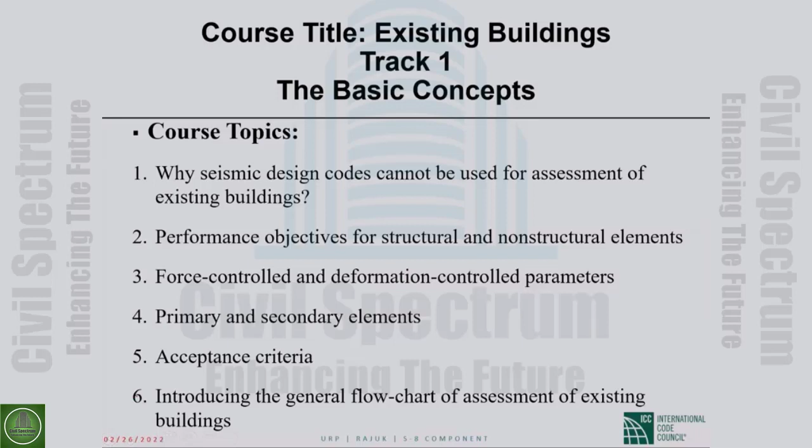First of all, I'm sorry that I will spend some of your time on material that all of you know. But as I said, it is very critical for us to find where exactly seismic design is separating from seismic evaluation. Based on that, we can make our methodology for the evaluation and later for the retrofitting.

So if we look at the procedure for design of a building, what that means for us, or what we do in designing the building—usually there are many elements in a building. We classify those members into load-bearing elements. Some of the load-bearing elements carry the gravity loads, vertical loads, some carry lateral loads. So these are the main point for us in design, designing these load-carrying elements.

Also, there are other elements in the building that we don't really depend on to carry the vertical or lateral load of the building. They just need to carry the vertical and lateral load of themselves and be anchored—that's good enough for us. So in design, mainly we look at the load-bearing elements. That's our main duty.

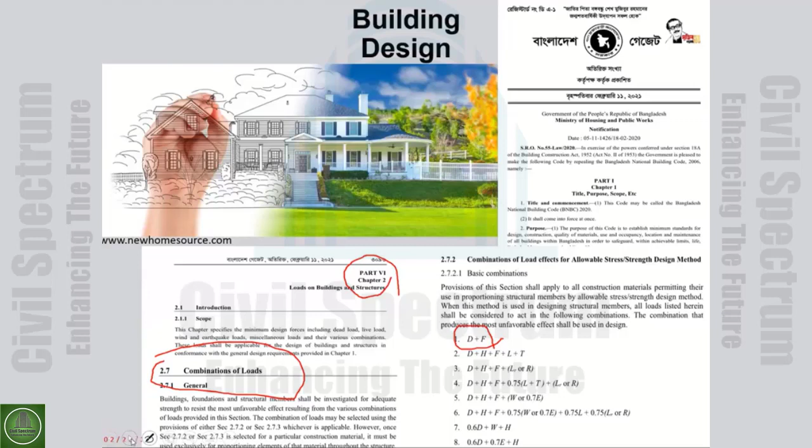Then sometimes many clicks needed to go up here.

Now that we have calculated the demands, we want to design. What exactly do we design? When we say design this building, what is the design? What item are we designing? As I mentioned, for a specific beam, there are different response parameters, for example, different force deformations.

For example, for the axial load, for the shear in the beam, for the bending moment, for torsion, we have the values of the load. The behavior that we want from each of these response parameters in building a structural design.

I emphasize building a structural design because later I want to go through building seismic design. But in the building structural design, we want the behavior of all elements to remain in the elastic linear stage. Because of that, the force-deformation relationships for axial, shear, moment, and torsion are all drawn in the linear range of behavior in the figures.

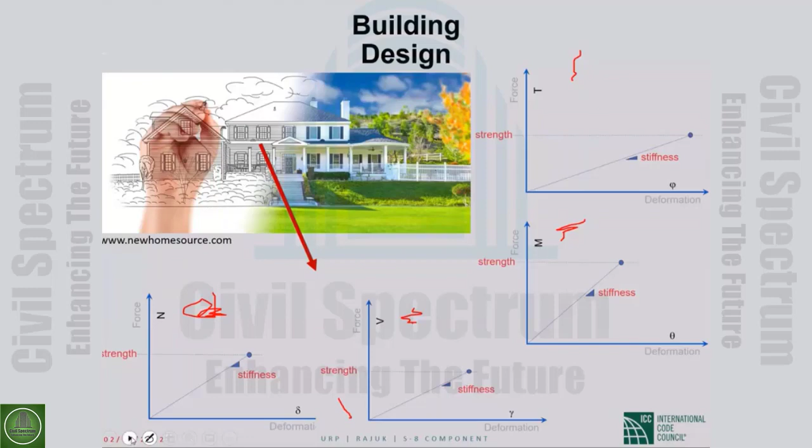As we can see, for example, in BNBC Chapter 6, it says 'strength design of reinforced concrete structures.' So it clearly says that all the articles here give you the approach for how to design an element to have a specific strength on the vertical axis.

Therefore, the load that causes this demand is not important. So in the steel code and the concrete code, in the chapter on design for strength, we don't say that if it's under, for example, dead load or live load, whatever load causes this much demand, we should provide enough strength that matches that demand.

So our design for buildings that don't get damaged is designed for strength, designed for force. Our design approach is force-based design. We design for force; all these articles are for designing the strength of the elements.

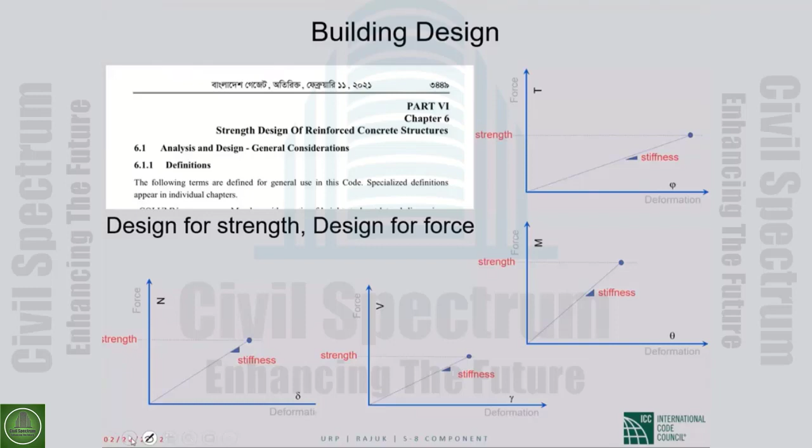As I mentioned, we design for strength and then check for stiffness. So, in short, for ordinary loads, we expect the building before loading and after loading to remain the same. Because the designer calculates the demands in all elements very precisely, and we have good codes so that for each element, each response parameter can be designed such that the capacity, the strength, is more than the applied demand. So in all the design codes, this is emphasized: it's strength-based design.

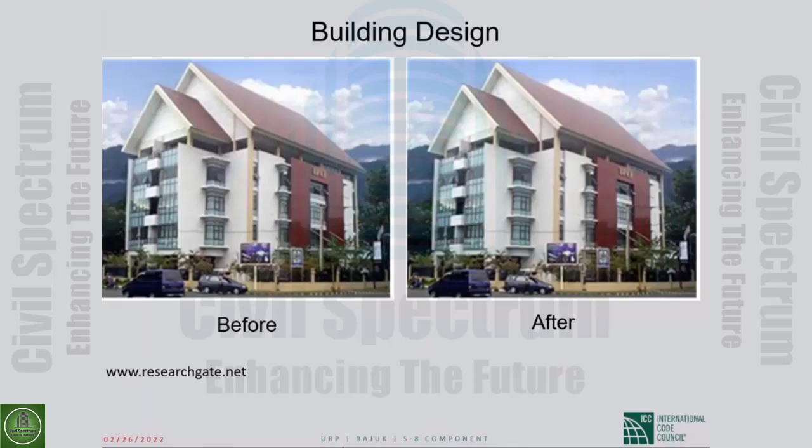But how about not ordinary, extraordinary loads? It depends. Some extraordinary loads are not that large, so it works for loading that doesn't always apply to the building. Every now and then there is some wind, and the amount of wind is not that much. So it's better to design the building such that it doesn't get damaged.

But there are many extraordinary loads that, if we want to design a building that doesn't get any damage under those loads, the design becomes very uneconomical. Again, it depends on the region, because if designing for earthquake, in some locations there are not that many earthquakes, or if they happen, the intensity is small, so it's worth trying to design them to remain linear elastic. But in many cases it is very costly.

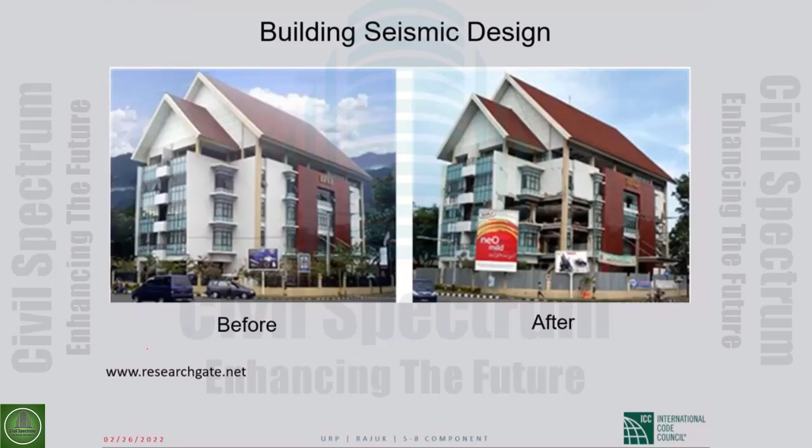And to be sure, these are referenced - I know you had courses on both the structural part design and seismic, but again, because I need them later as talked before, we have in chapter 6, for example for reinforced concrete, the strength design - all the items there is for designing under ordinary loads, the way that the building remains undamaged. But then we have article section 2.5 on earthquake loads, and then in 2.5.2 earthquake resistant design, and the bad news are said there.

It says that the purpose of the earthquake resistant design provision in the code is to provide guidelines for design and construction of new structures, subjected to earthquake ground motion, in order to minimize the risk to life. Minimize, not avoid completely - we don't expect a building that doesn't get any damage. For all structures, to increase the expected performance of higher occupancy structures as compared to ordinary structures, and to improve the capability of structural engineers.

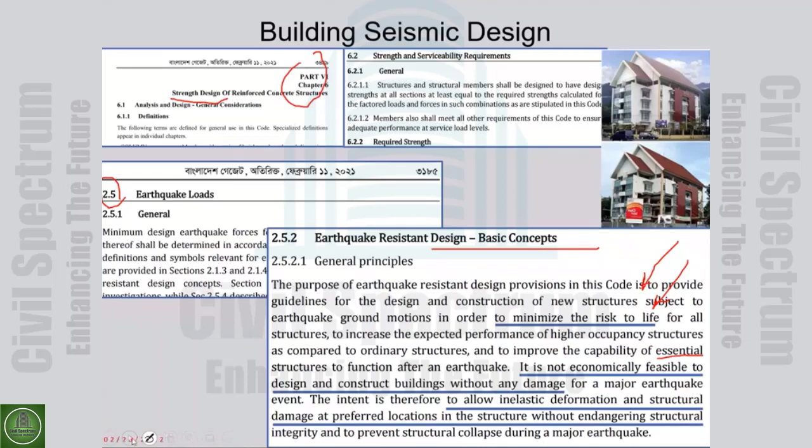One good thing that researchers usually do after earthquakes is use the earthquake ground motion record, and sometimes the specifications of the buildings, to model and study what happened to a particular building.

For example, this is from a paper presented at a world conference assessing damage to a 5-story building during one of the earthquakes in Chile in 2010. A very nicely built building like this, after the earthquake, becomes this. For sure, the intent of the code is not this way.

If everything was designed according to code and this happens, and if the level of earthquake that occurred is around the design level earthquake, then we should change something in our code so it doesn't happen. Because we accept damage, but as mentioned in the BNBC, we don't accept collapse, just damages.

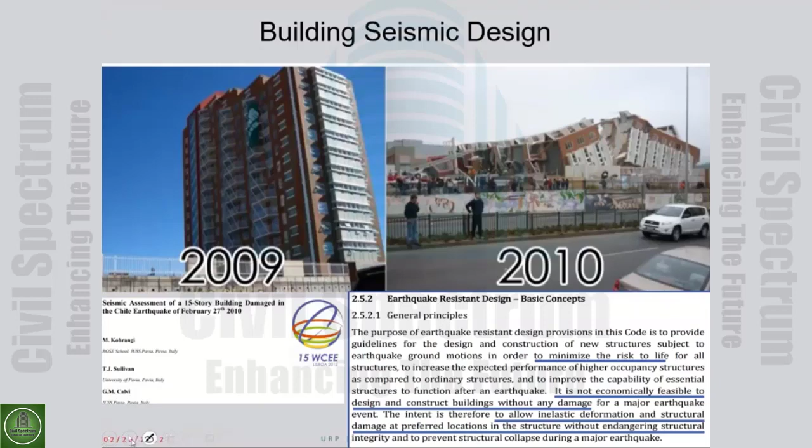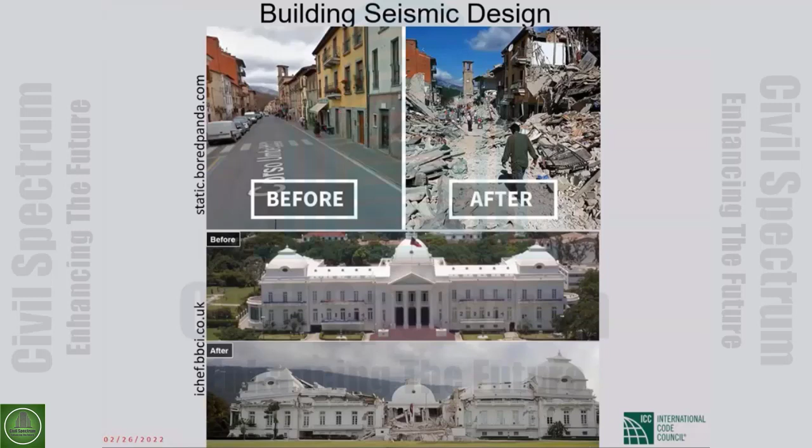Another example here — again, these are not according to code. Or if it's shown they really designed them according to code and this happened, then we look at the level of earthquake. If the level of earthquake is around the design level and this happens, then our design articles, approach, and requirements need some modification. We don't accept this — the code, when it speaks of acceptable damage, means not losing stability or integrity.

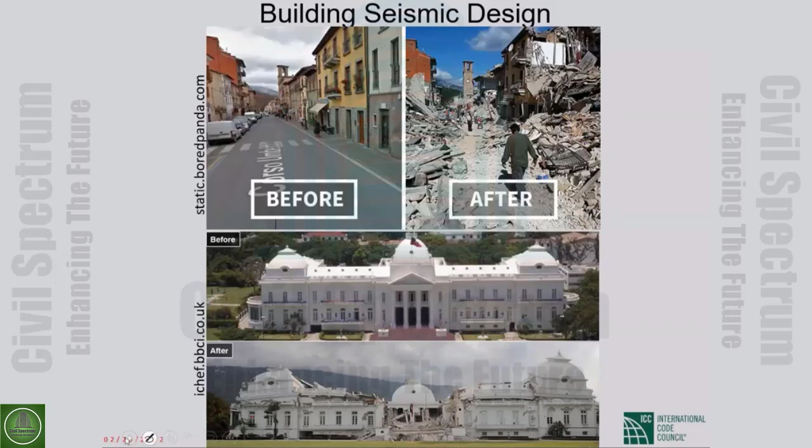Here, for example, in the bottom picture, the middle part had more irregularity compared to the other parts and got most of the damage. So we don't expect this much damage. It is not according to code, and if it is, the code needs a change in that respect.

This one is also not the way we expect or accept as the intention of the code. For example, the building before the earthquake has a floor at the ground level, but after the earthquake, the ground floor is gone. As you know, soft story relates to stiffness, and weak story relates to strength on the vertical axis. A weak story has less strength, and a soft story is one where the slope of deformation for the story is low.

In previous versions of the code, the penalty for irregularity was only a change in the method of modeling and analysis. So if you had a building with some kind of irregularity, previous codes said there's no problem — you can go ahead, but you should use more sophisticated analytical methods, like response spectrum or dynamic analysis instead of static analysis. But they didn't forbid you from designing a building with irregularity.

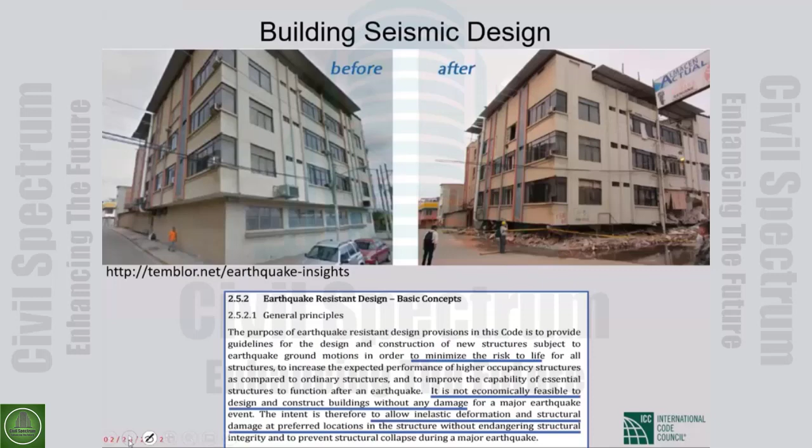If this is designed with code, and it does happen, it was not the intention, and they should modify the code provisions. But these are according to code.

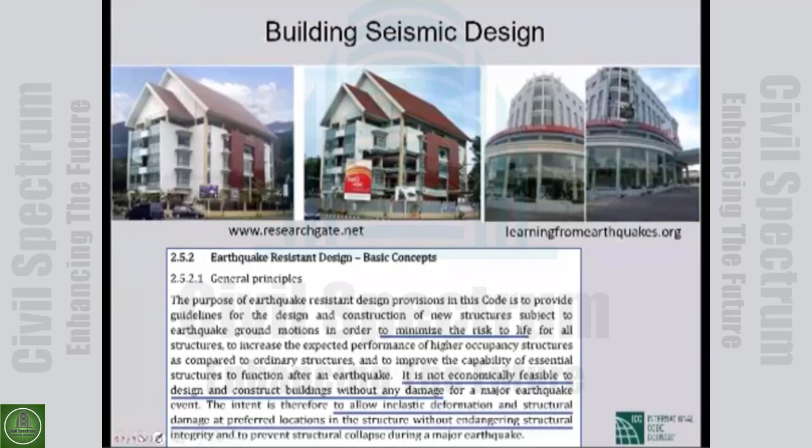The building gets damaged. There are lots of damages in the elements, and most probably this building will be demolished after this earthquake.

This one maybe can be taken care of with some retrofitting, but anyhow, this is the building that we, as a structural expert, give to our clients, and after this earthquake, they don't believe us that we design according to code, because they thought that if your building is the new building according to new code, it shouldn't get damaged. But really, we are designing for damage. The way that we design, we expect this kind of damage.

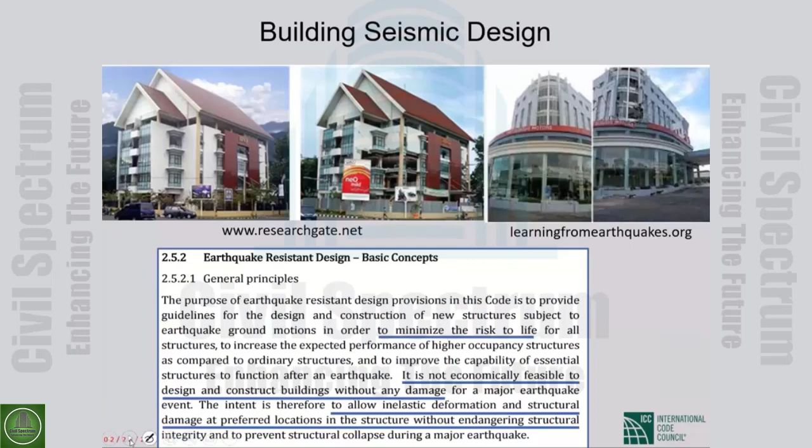So, very good. Now, how can we handle that in the new code, this kind of very complex behavior? How can we handle that in our design for the new buildings? Then we can use the same approach for existing buildings, so there is no need for an extra approach, extra code, extra course. What is the problem? Where is the problem? We should try to find the problem.

So again, the main question is, can we use the seismic design approach of BNBC for assessment of existing buildings? We are using this approach, a very nice, up-to-date code for the new buildings on the left. For the new buildings, we model, we check the stress ratios. If there is a problem, we change the property of the element, solve it, and then we get the final design. No big deal, nothing too complicated needed, and we are using such an advanced seismic design, especially for these new complex buildings.

Then for existing buildings, for old ones, it should be much simpler. We shouldn't make it more complicated. But why is it like this, that we make it so complicated for existing buildings, which are generally much simpler, older buildings, compared to these new, complex, up-to-date buildings?

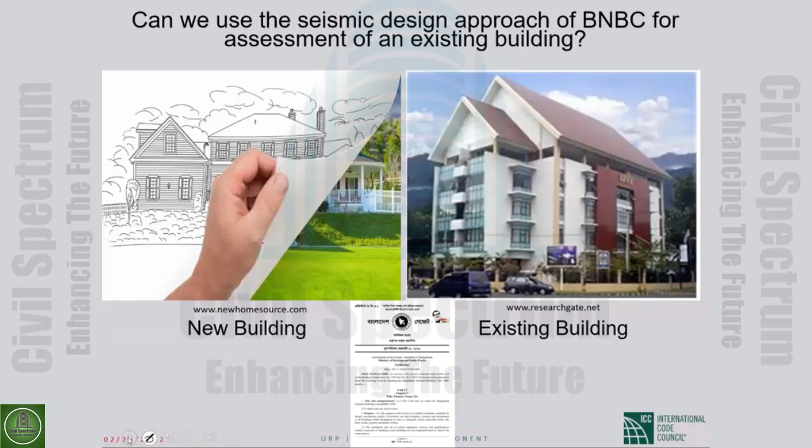Therefore, we should look at BNBC, I wrote NBCC, so BNBC, seismic design for assessment of a building, how it works, how we design for such complex behavior for this building, for example. Lots of damages at different points, but it has a stable situation and integrity almost remains. So how do we do that? Which complex software do we use to handle this kind of behavior?

Where do we look at the inelastic deformation, how do we check if this inelastic deformation, which means damages, if these damages are endangering structural integrity or not. Where during design, I can't see any location that we really model or check any damages, or level of damage.

No, everything was so simple: calculating a base shear, distributing it along the height, using an elastic model and software, calculating the response parameters in the elements, and then going to the code and designing so that the strength is more than the demand. So where is this complex behavior that I've shown down there? Where do we look at it?

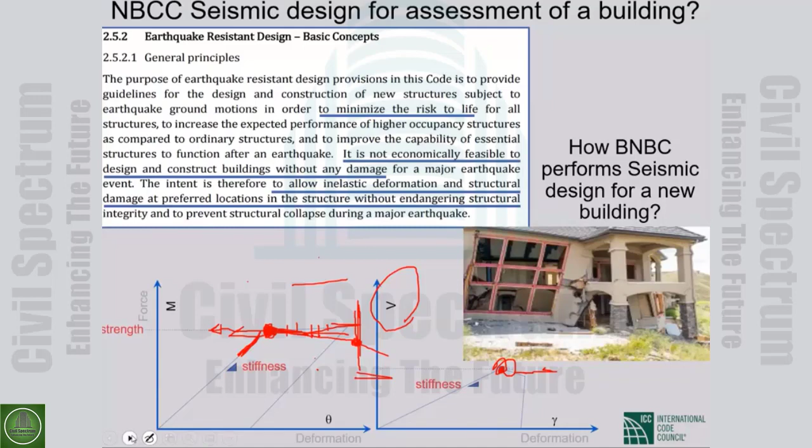Go to BNBC. What do we do in the BNBC? We assume a level of earthquake, for example a fraction of the maximum acceleration for an earthquake with a return period of 475 years, modified by some coefficients. This acceleration multiplies by the mass, the G now is the mass, it becomes weight. Using the second law of Newton, we get the force.

So everything is almost clear, a very easy approach. We calculate the acceleration, multiply by the mass of the building, get the force the building should withstand, and then we design that building for this.

What exactly do we do? We calculate V, the base shear, we apply that in the load combination with other loads to the building. For each element we calculate the maximum response parameter, and then we design. But when I say design, we design strength, the strength for this. And that's done.

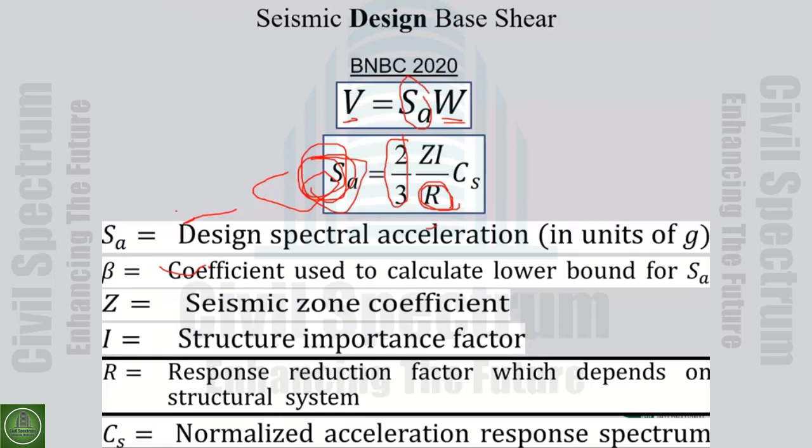Here we impose damage. You know that the design level earthquake will impose R times this value to the building, but we design the strength, ordinary strength design, for 1/R of that load. So we accept damage - we, as a designer, are making damage to this building at the design level because we divided by R.

Okay, now we did a good job. We reduced the strength, and now we are sure that in the design level earthquake the building will get damaged, for sure, because our estimation is R times that will impose to the building. But we put the strength, the capacity, at 1/R of the demand. So it will get damaged.

But how about looking at the level of those damages? If those damages are acceptable or not for each element, for each response parameter, see if the level of inelastic deformation passes the ductility capacity of that element or not. But usually we don't do that.

How is it possible? It's a dangerous approach. We design a building for, say, 1/5, 1/7, 1/10 of the loading, and then we are happy that it won't collapse—it'll get damaged, but won't collapse. No, it's not that simple.

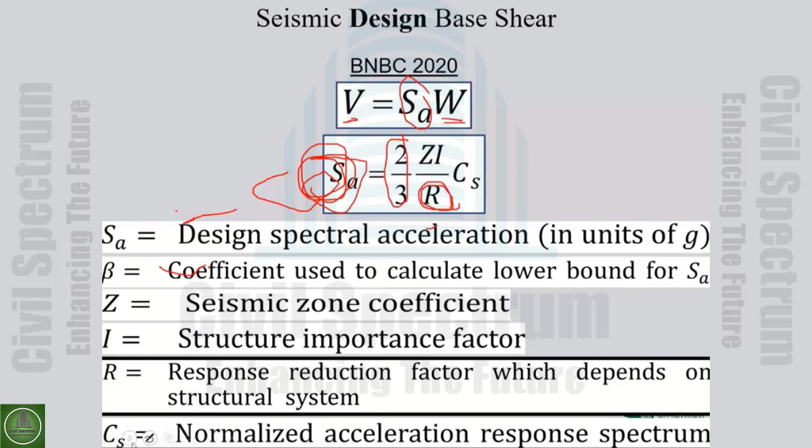For these R values, how we calculated that is based on the behavior of each lateral load system. We look at how much ductility each system has, and based on the ductility that system can provide, we assign a specific value for R. If a system's capacity for ductility and damage before losing strength, before losing integrity, before losing stability is less, we use less. And if it's more, we use more.

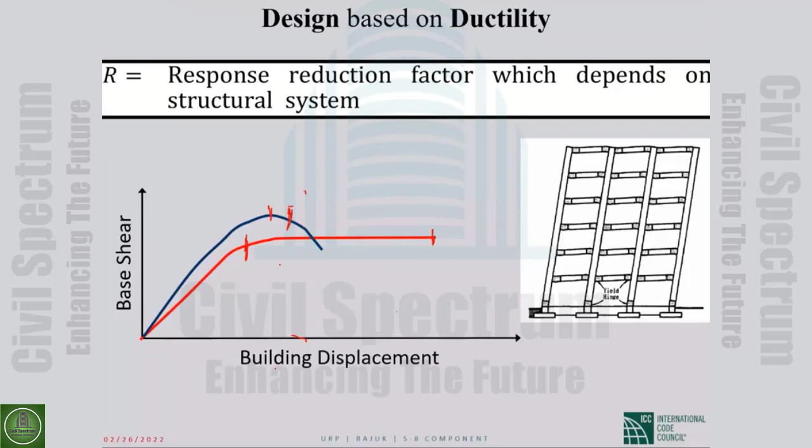So the relation between these concepts: we design for a smaller strength that we know causes damages. We know that causes damages because it is R times less than the level of base shear for the design level earthquake. And a design level earthquake is just a 475 year return period earthquake. It's not 1,000, 2,000, 3,000 years. It's just 475.

So it's not a big deal. But again, even for that, we divide the base shear by R, 1/5, 1/7, 1/9, 1/10. So we reduce really drastically the amount of base shear. So we know that strength is very less than the applied load.

And this gets damages. Ductility is the capacity that with our design and detailing, we can make those damaged parts behave such a way that they get damaged, but the stiffness can go to zero, it becomes a mechanism, but it can handle some plastic deformation without losing strength. This is the key word, without losing strength.

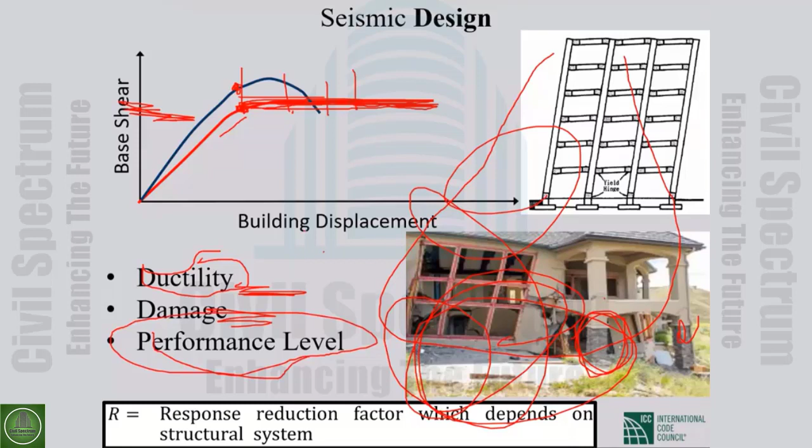So performance levels that we see later are different levels of damage: here becomes IO, here becomes LS, here becomes CP. So the relation between ductility, damage, and performance level is they are directly connected, saying the same concept. So by assuming R in our formulation in BNBC, we accept that we need ductility, we will have damage, and the performance levels are not elastic performance levels anymore.

The building will get damages. And this very difficult behavior is covered by design requirements, by prescriptive design approach, and by detailing. We don't see that in the model. We will continue on this to reach the point that, unfortunately, for the third part, this approach is not working for existing buildings. And because of that, we need this course.

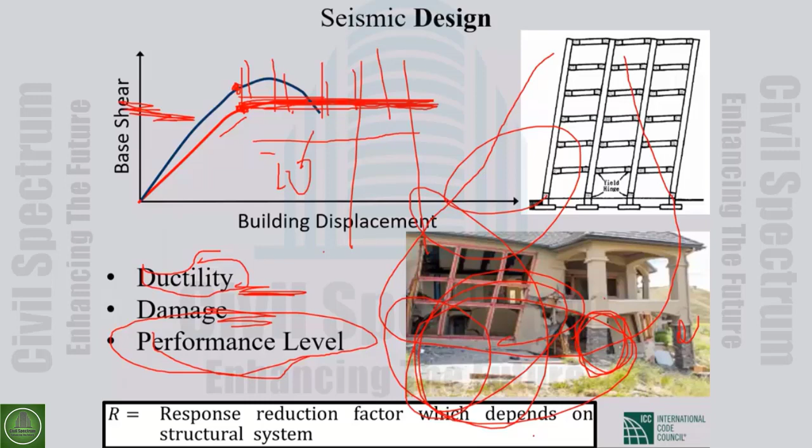Therefore, if we continue, as I mentioned, the vertical axis here is base shear, and the estimation of the base shear in the design level earthquake by BNBC is this value. This value is the estimation of BNBC of the design value, that a 475 year return period earthquake will impose this much base shear.

But we cannot build the buildings for this much, because we see for buildings in earthquake prone zones, usually this value is too much, so it becomes a very strong, very heavy, very costly building. So very easily we accept damage. In the calculation, we say put for this level of strength this much, or this much, for R1 or R2.

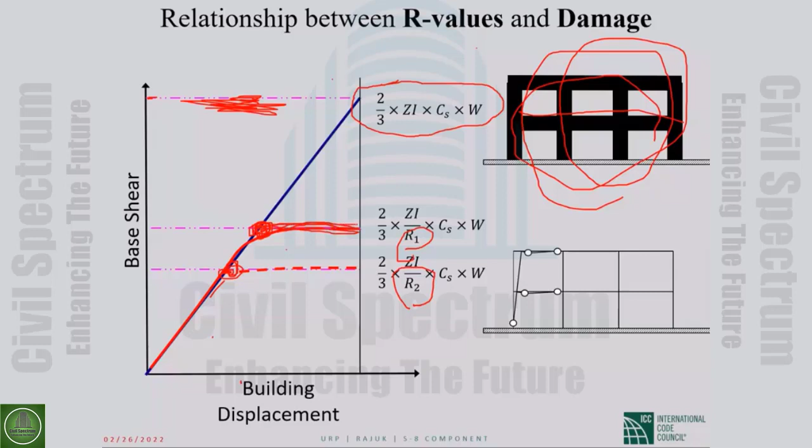But we know the consequences. If you design it for R1, you should provide this much ductility capacity in the building. But if we consider that for all the cases this is the level of deformation in buildings, which for many buildings is true, then if you design for R2, you should pay for it with much more detailing, because now the building has very small strength, very easily gets damaged, and you should provide lots of capacity in these points that get damaged.

Very good detailing is needed. It's not easy that a reinforced concrete section gets damaged, the reinforcement yields, cracks increase, and still it keeps its strength. Still the stiffness is zero, so much damage that the stiffness is zero, but it still keeps the level of loading it was handling before. It's lots of detail.

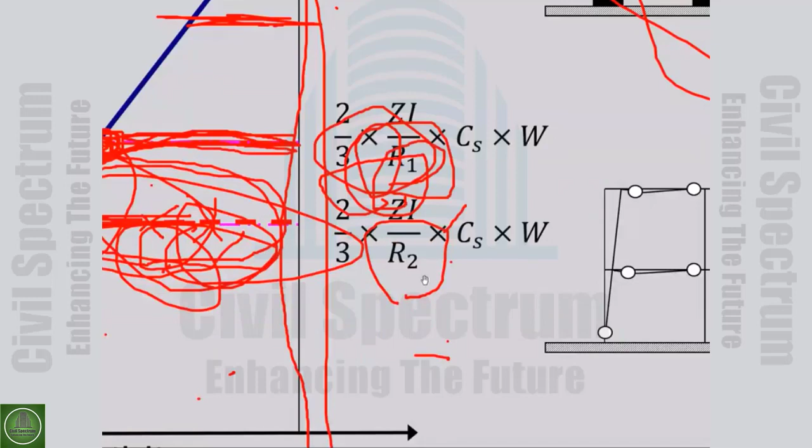Therefore, that's the main point in our approach for new buildings. What is this? Okay, that was in fact a very good thing.

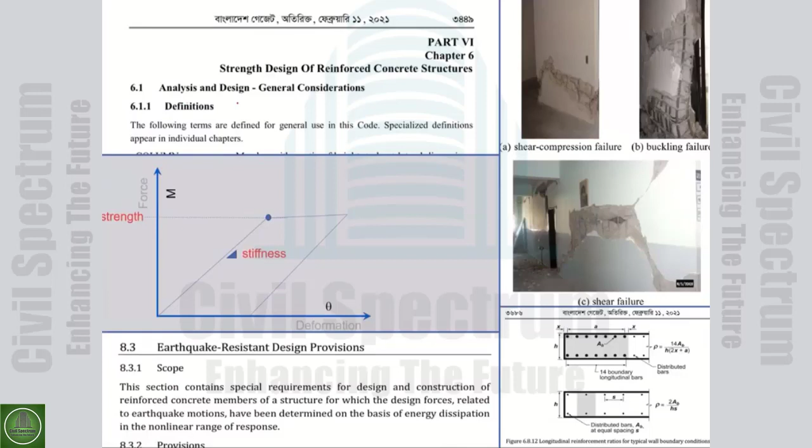So, as a sample, if we want to check where those difficulties and complexities lie, in chapter 6 in general... no sorry, chapter 6 was strength design. Where are those complexities here? 8.3 - earthquake resistant design provisions.

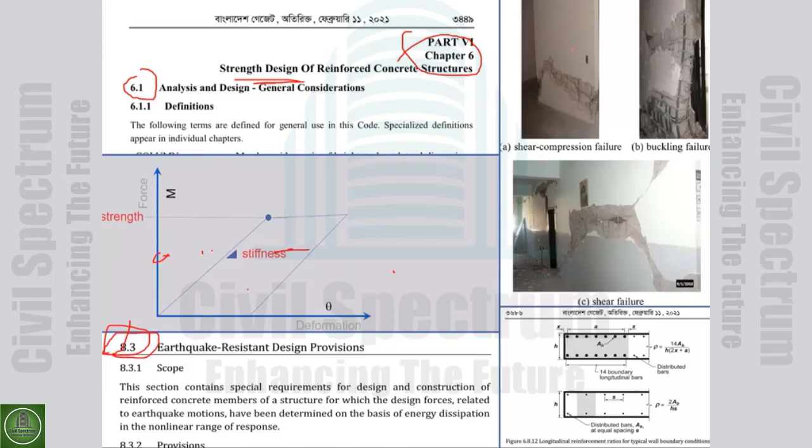Here you see detailings, lots of details, for this building with a shear wall that we are designing so nicely and simply - elastic, in SAP, in ETABS, very easily. But if we expect such complicated behavior during earthquakes, we don't actually model this behavior.

We just use detailing provisions, which we can call ductility-providing chapters. You see here it says earthquake resistant design.

The name of the loading is here. We shouldn't name the load in the design code. What is the difference if axial load is from dead load or from live load? We want this much strength, we want to design for this much strength. But here, we don't want the strength.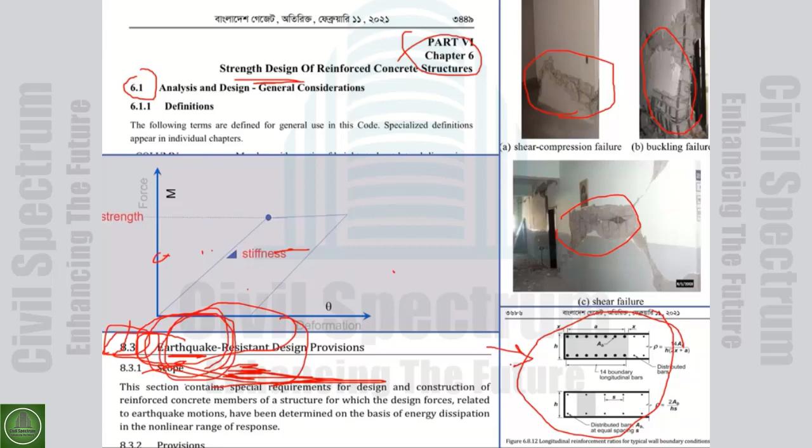We want the ductility. For this specific loading that requires ductility, you don't check it in the design or modeling analysis - by just applying the provisions, you get acceptance. So, to summarize, earthquake resistant design for new buildings has two parts.

One part is simple modeling and analysis. This is part one - very easy, simple, elastic, linear. We apply the load divided by R as the base shear and design the strengths.

We know everything we get from this is technically wrong. We know the displacement isn't accurate, because the real displacement in the earthquake is more. Because of that, we always multiply the displacement we get from SAP or ETABS based on the system we are using. But we are putting a smaller strength into the elements, and we know that this causes damage.

The second part, taking care of this damage, is not in the modeling analysis. We could ask that everybody designing a building for earthquakes use nonlinear analysis, because the behavior of a building during an earthquake is nonlinear - it gets damaged. So you should model the building completely nonlinearly.

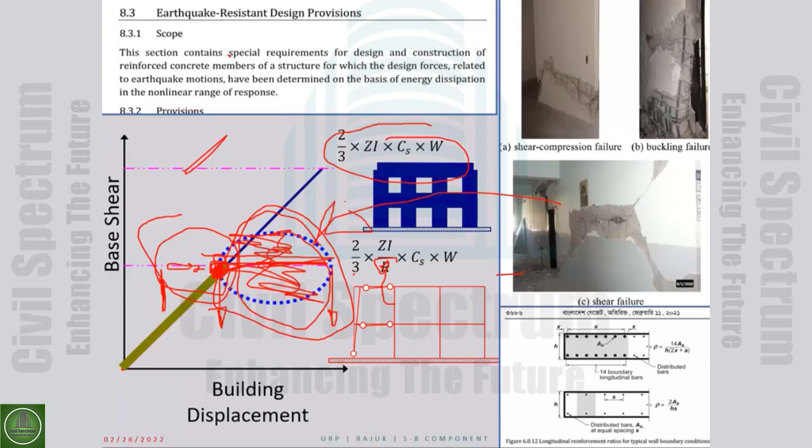Can you hear me? I think I lost the voice. I hope you can hear me. Can you hear me? Yes, Dr. Moghadam, we can hear you. Hello. Hello. I hope, Dr. Moghadam, you have... because I lost my voice in this system. We can hear you, Dr. Moghadam. Okay, assuming that you have my voice, I'll continue. Hopefully, Dr. Moghadam, can you hear me?

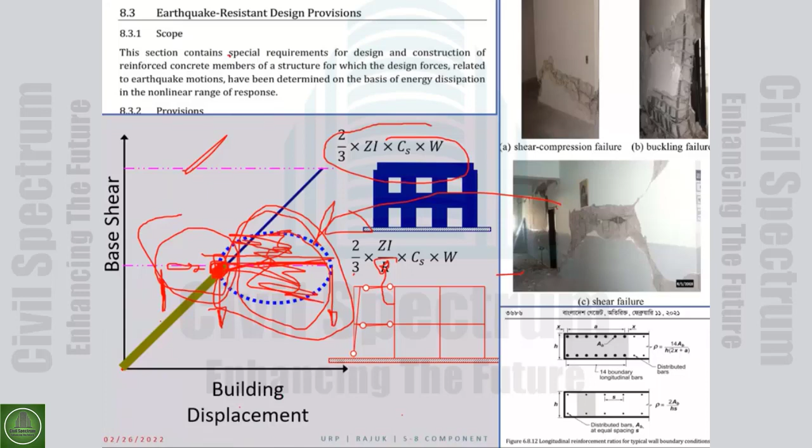That's true. Okay, so to summarize the way that we design buildings - for new buildings, we use a very easy approach for the modeling and analysis, and then we have...

Okay, I have a message. We still have... oh perfect, I put this here. Yeah, very nice of Mr. Rudra. Yes, please give me feedback, because I put a system in front of me just to see if my voice was going through, and it disconnected. Perfect.

So what we can do here, to give the general approach, very simply - in BNBC, we estimate the base shear.

For design of existing buildings, tomorrow we will discuss how we calculate the base shear. It's much simpler than BNBC, so it's easier. It's a couple of coefficients, and then again, second law of Newton, same as here. Here the coefficients seem much more difficult than here, so again we do the same thing: calculate the base shear.

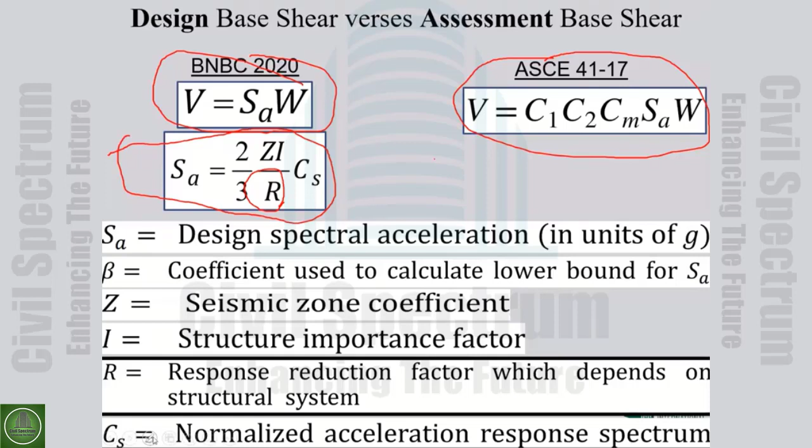I should also remind that when we say evaluation or assessment of the existing building, it's not always a very difficult job. All of you experienced structural engineers, you know, you have lots of experience. You just go to a building, a concrete building, a masonry building, steel buildings. You can find many deficiencies and provide some detailing or advice to increase the seismic behavior of that building. It's not very... the easiest is just to try to reduce the weight of the building.

Some of the floors, some of the slabs, some of the partitions - if you can reduce the weight, it will reduce it. So not always the evaluation and assessment of existing building should be difficult. Just when we say the systematic way is more difficult. Otherwise, we have many methods.

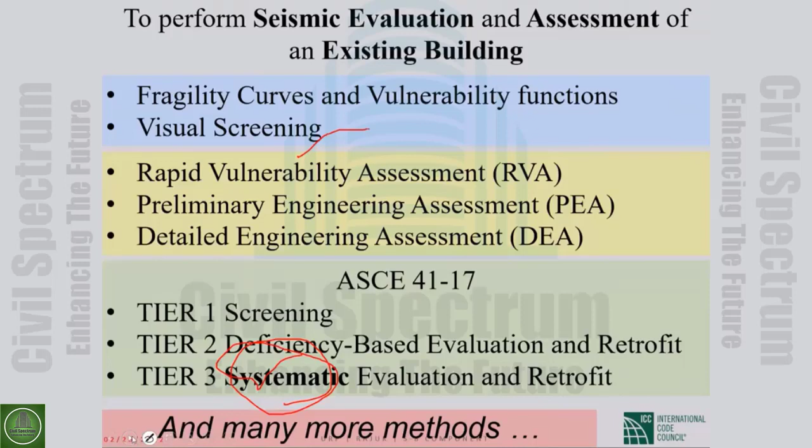That's the systematic evaluation. So when I say systematic evaluation, I repeat - systematic evaluation means we want to check the building, the performance of the building at different levels of earthquake, and come up with results showing it can pass the requirement of that performance level. This needs modeling.

Therefore, when it comes to earthquake consideration for buildings, we have a long history of codes and standards for new buildings, such as BNBC. Very up to date, very good.

For existing buildings, during these 10 years it has become, mostly you see in the world, like a standard. Before it was pre-standard, just some recommendation.

But for buildings that experience damage, they are even more difficult to model, because from the cracks, from the residual displacements, you should determine for each element how much to reduce the stiffness, how much to reduce the strength of that specific response parameter, and how much to reduce the ductility capacity of that element because of the observed damage.

As far as I know, we don't have a standard or code for post-earthquake damage assessment. We have a few reports, but not good ones.

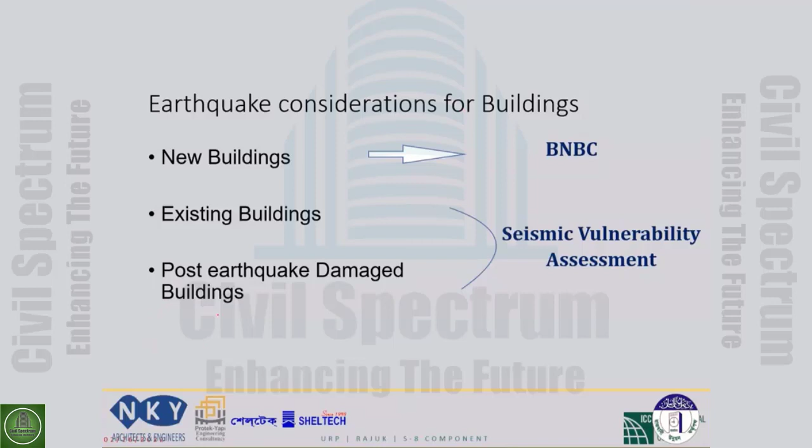So for new buildings we have a long history of engineering. Existing buildings are much newer for systematic evaluation. For post-damage earthquake buildings, we are still a little far from a systematic approach.

For this systematic approach, sometimes it's called DEA, detailed engineering assessment or detailed engineering analysis, sometimes it comes under ASCE 41 systematic evaluation and retrofit.

There are some concepts that are needed. We should be able to consider different levels of earthquakes, and we should have different levels of damage, which we call different levels of performance. We should be able to check whatever they ask us.

If they say check this building for this level of earthquake, for example a 100-year return period earthquake, for this level of performance, we should be able to. If they say for a much longer return period earthquake, for another level of performance, we should be able to do that too. So this performance-based evaluation is a main part and main structure of this approach.

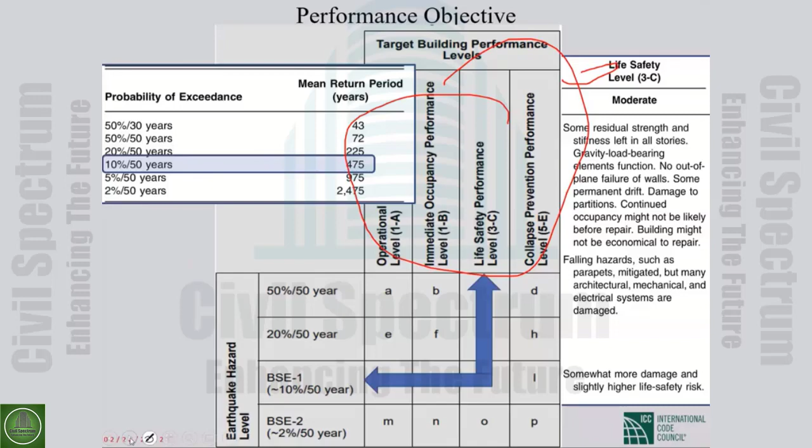So it's very important that for life safety, gravity load bearing elements shouldn't have out of plane failure, some permanent drift, damage to partitions. This gives a sense of what we expect when we go to the building after an earthquake. But then we have specific engineering demand parameters that quantify this life safety. This is the general overview of the damage, but then we need quantification, and the quantification is acceptance criteria - such as the M factor I mentioned instead of R factor.

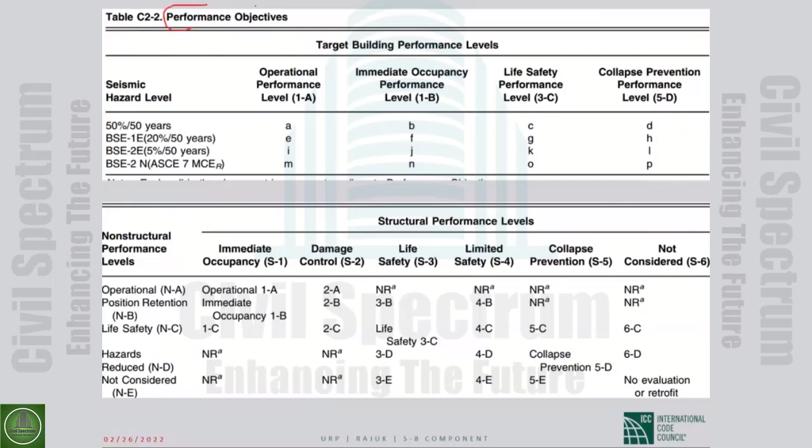So one important part of this systematic existing building evaluation is discussion about performance objectives. Because otherwise, many times the people who use a building and want to retrofit it have very unrealistic ideas - that it behaves very well under very large earthquakes, and that retrofitting can be provided, but it will be very costly. So the consultant should explain the consequence of selecting each performance objective.

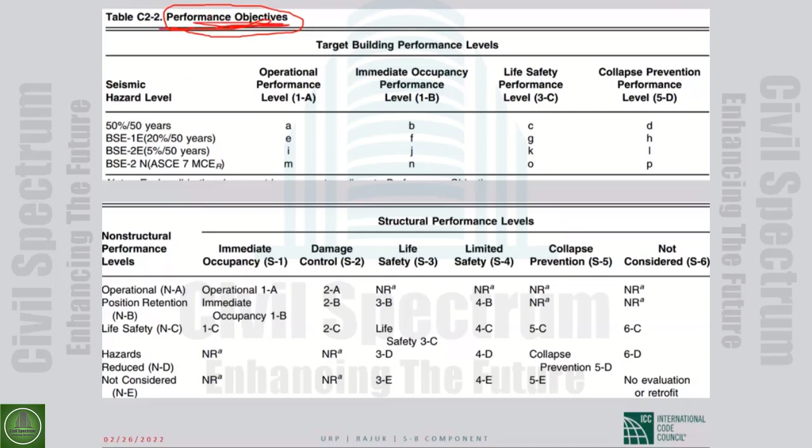When you say, for example, for this earthquake, I want my building to reach immediate occupancy performance level, providing this same performance level under larger earthquakes will be much more difficult. This performance target - building performance levels - have two components: one is structural, one is non-structural.

So you can see here, when we say immediate occupancy performance level is 1B - 1 is for the structural part, immediate occupancy, and B is for the non-structural part. Another table will show it. So very nicely separated, showing what you want from the structure at different levels of earthquake, and what you want from the non-structural elements at each level of earthquake. Sometimes it's not recommended to select certain combinations, especially for non-structural elements - that happens very often. So when we say the structural performance level, it means how much damage you accept.

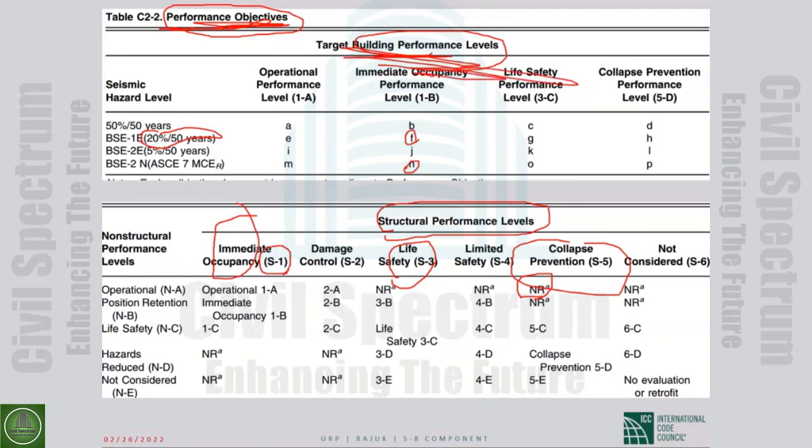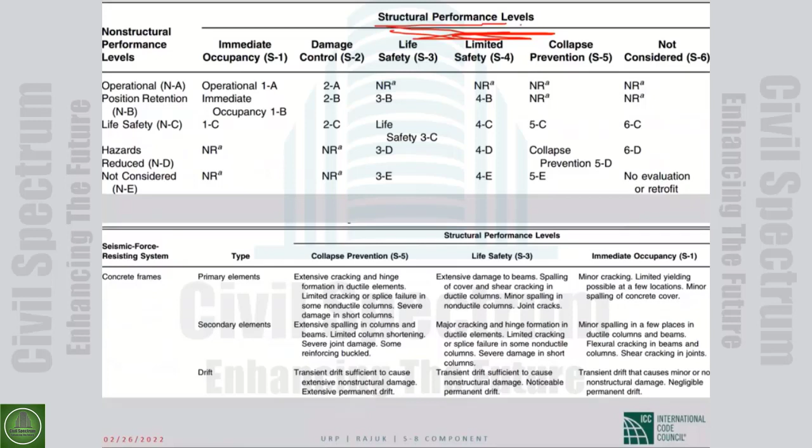So for the building, the target performance level for the structural parts, same thing here - structural performance level.

Here I copy the concepts for structural performance levels, same table as the previous slide. For example, for a concrete frame, when we say collapse prevention, what that means to the primary elements - those that carry the lateral load versus elements that just carry the gravity load. From the drift point of view, that's what collapse prevention means.

When we say life safety, what it means for a concrete frame is extensive damage to beams, spalling of cover, and shear cracking in ductile columns. In immediate occupancy, it's minor. But in collapse prevention, it's extensive.

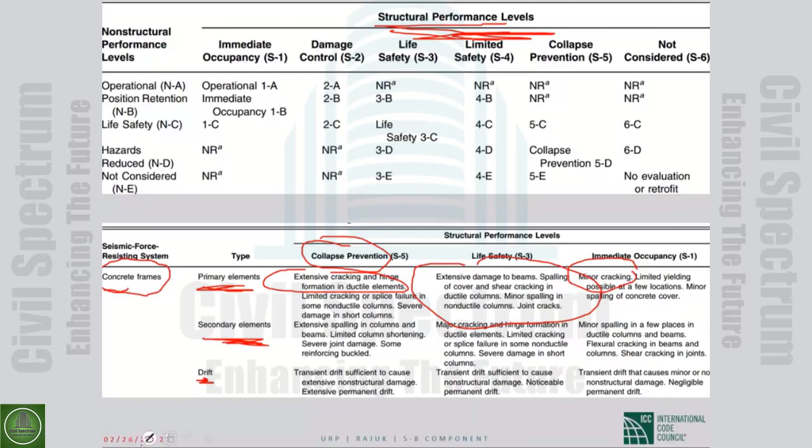So here, everything is very general, but it will be quantified with numbers and tables, both for the linear analysis tomorrow and the nonlinear analysis on Tuesday. This gives a sense of what each performance level means - how much damage we expect.

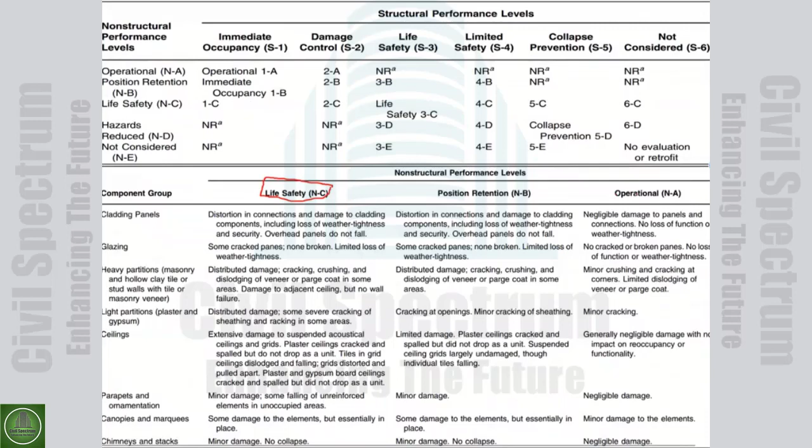For non-structural elements, again, every version of the code changes the definitions. Before, for example, it was life safety, immediate occupancy, and operational. Now we don't have immediate occupancy - we call it position retention, because for non-structural elements, it's important first that they don't cause fatalities, since many fatalities in earthquakes are because of failure of these elements.

For example, infill walls - non-structural elements can cause lots of problems for life safety. Then maybe we ask that these elements stay at their position, which is a higher level, and even more if we want them to function after without much repair.

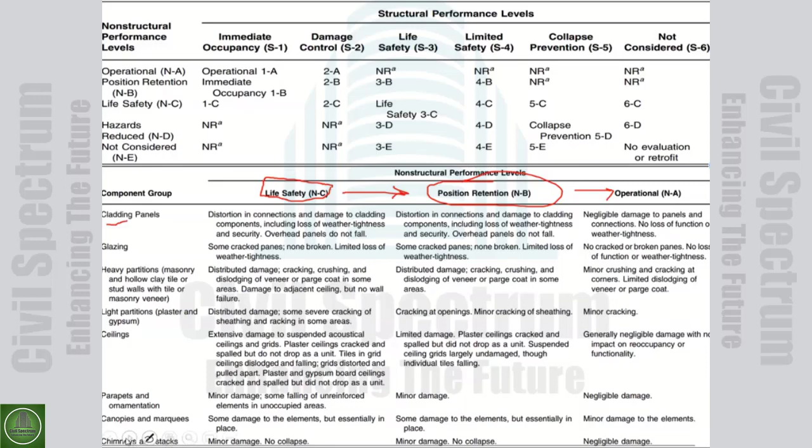So for everything - cladding, chimneys - this explains what different levels of performance mean in terms of the state of damage we expect, and we will quantify them with numbers as we go.

So there is an important thing. As we said, there are lots and lots of approaches for the evaluation of existing buildings. It's very simple, but when it comes to systematic evaluation and repeat analysis...

We don't want any simplification, because simplification means overestimation. We don't want any simplification. So it's very complex - we want it to be as complex as possible. We don't want it to be simple.

Because when you want to be simple, it means you approach multiple beams the same way. So you'd consider the worst beam as the case for design to be safe. So it becomes costly - we don't want that.

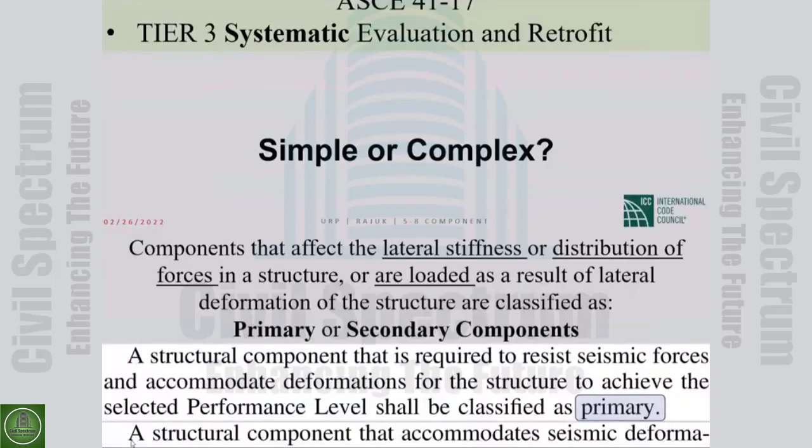So I'll give you some samples of how this becomes. The main thing is we divide - every subject will be divided.

For all load-bearing elements, we don't use the same approach. We call some of them primary, some secondary. For primary elements, all the acceptance criteria are different than for secondary.

Primary elements are those we consider carry most of the lateral load. Secondary elements are those we expect mainly carry gravity loads, but we don't want them involved in carrying the lateral load.

There's no time, but we have the same concept for new buildings too. When you design a building, most codes let you assume that all the frames in one direction are moment resisting frames, concrete moment resisting frames.

But as a designer, you can assume just two perimeter frames are the lateral load resisting system, and the middle ones, for example, are secondary, as gravity load. The concept is there too, but here it's more highlighted. So we divide, and deal with primary elements in one way, and secondary elements in another.

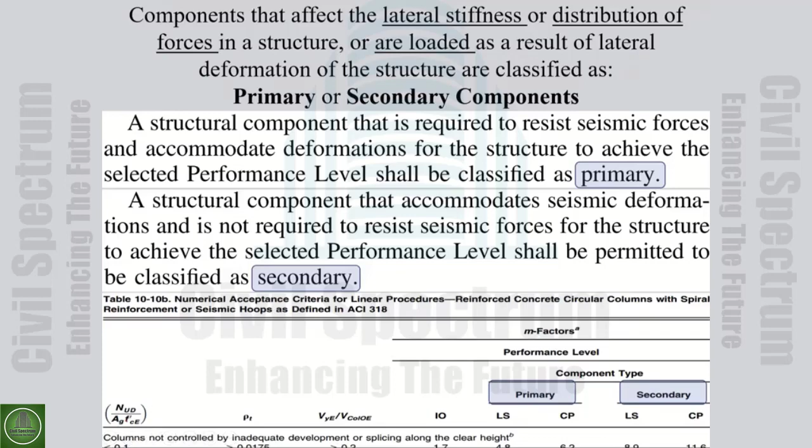For the parameters in the elements I mentioned in beam, we have axial load, shear, bending, torsion. We divide them - some are deformation control, some are force control. Based on that, we determine how much ductility they can provide after reaching their strength, how much plastic deformation they can carry after yield without losing strength, and after losing strength, how much more they can carry with residual strength. The detailed numbers are here, but we divide.

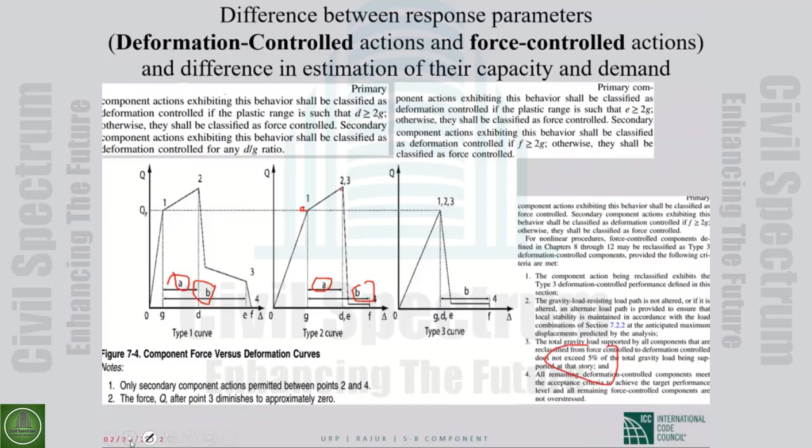With deformation control we deal in one way, with force control in another way. That's the approach here. We try to divide as much as possible to make our work as complex as possible, because it's engineering work - in the office, work is no problem. But applying retrofitting on site in a building that is working is very difficult. That should be reduced - cost and distortion should be reduced.

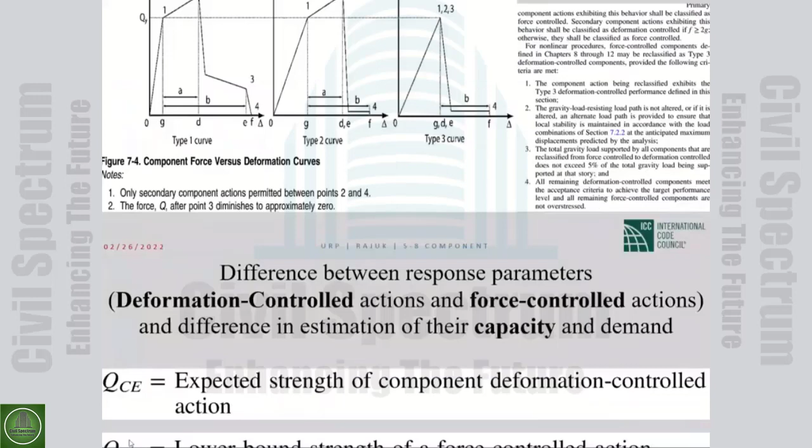Very interesting - here is, for example, concrete. This part is concrete, this is the beam, the same concrete. But as I said, for calculation of capacities, usually in existing building codes we don't provide new formulas. When we want to estimate the strength of the element - shear, axial load, capacity of the element - we use the same formula from ACI, from whichever code we are familiar with. But the material property we put in is different.

So this is a beam, we test it. They ask, what is the strength of concrete here? We say, what do you want it for? Do you want it for calculation of force control strength or deformation control strength? It is the same material, but for the parameter that is sensitive for force control parameters, we use...

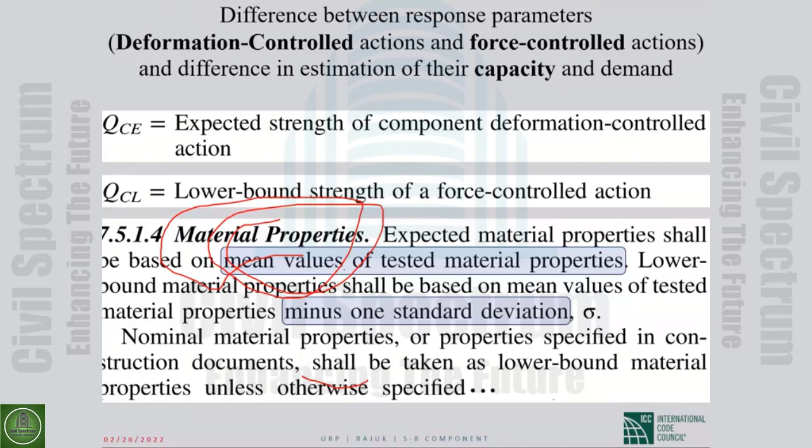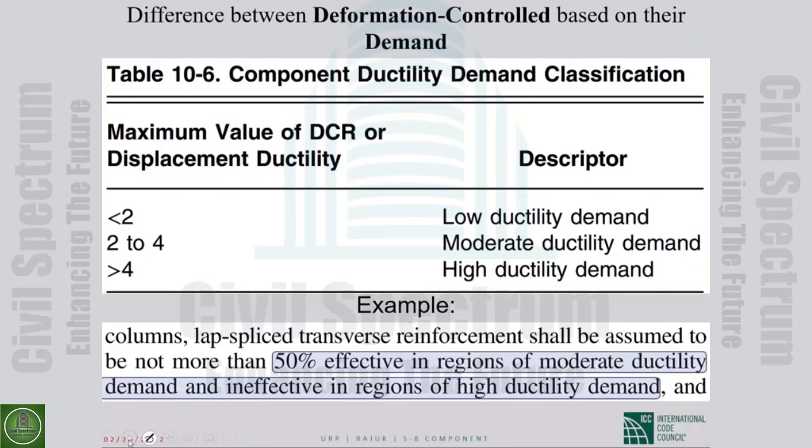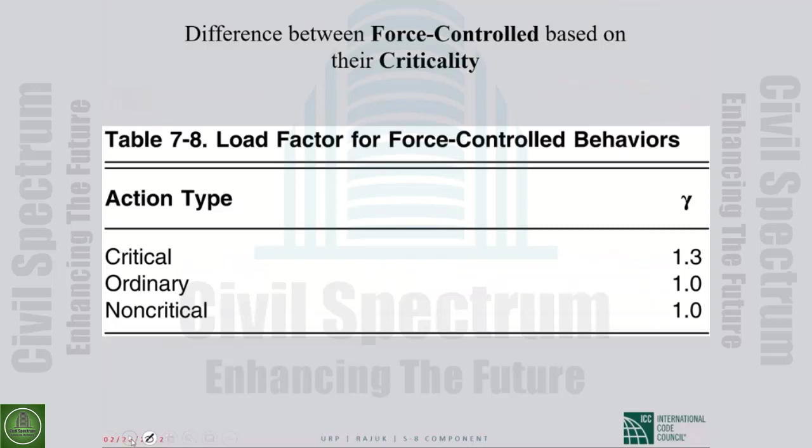The same approach - so, for example, we introduce another parameter, ductility demand, for example. Now I can go faster to reach the review part. But even for force control behavior, we make it for critical ones - we look and deal with a modification factor for ordinary, non-critical elements. So that's the approach.

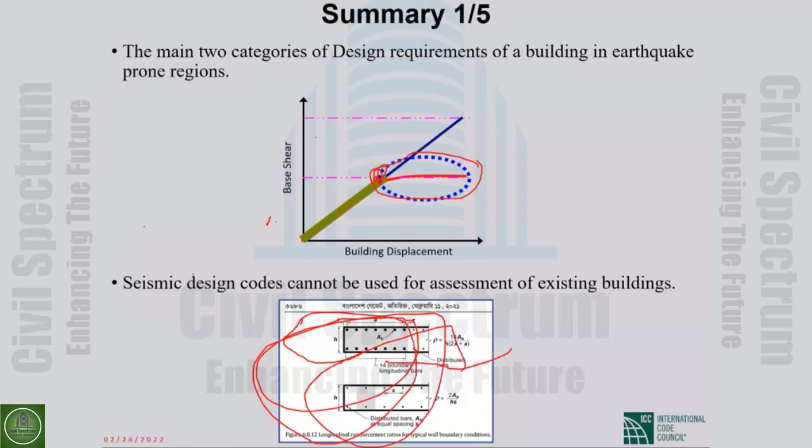And the main question of tonight: why can't seismic design codes be used for assessment of existing buildings? Because they don't have the needed requirements, the detailing according to new codes. So you can use those approaches when buildings have the same good detailing.

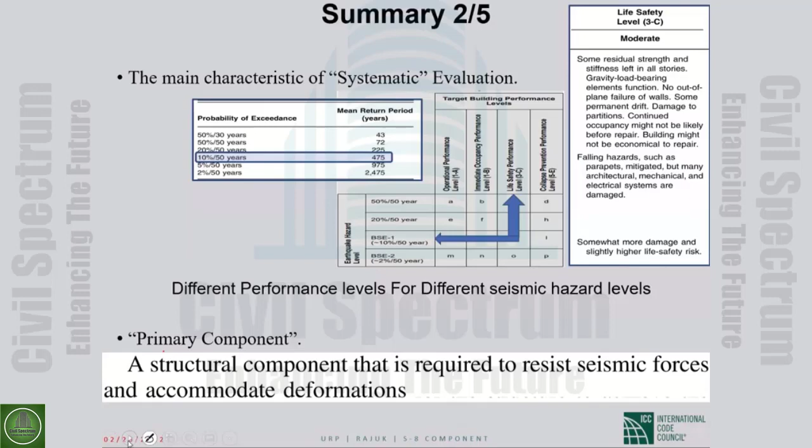When we say systematic evaluation, what does systematic evaluation mean? Systematic evaluation means we should look at different performance levels, different seismic hazard levels. Systematic is two things. What was the main characteristic of primary elements? Primary elements are the elements that we rely on to resist both seismic forces and seismic deformation. Deformation control function - what is the difference with force control?

The deformation controls are more ductile. Force controls are the ones that are brittle.

What that means about different performance levels, for example life safety. What is that? You should feel the damage level. For example, this much ductility means this much damage, this much damage is immediate occupancy. Life safety is more damage than immediate occupancy, and less damage than collapse. So it's a sense of damage, the performance.

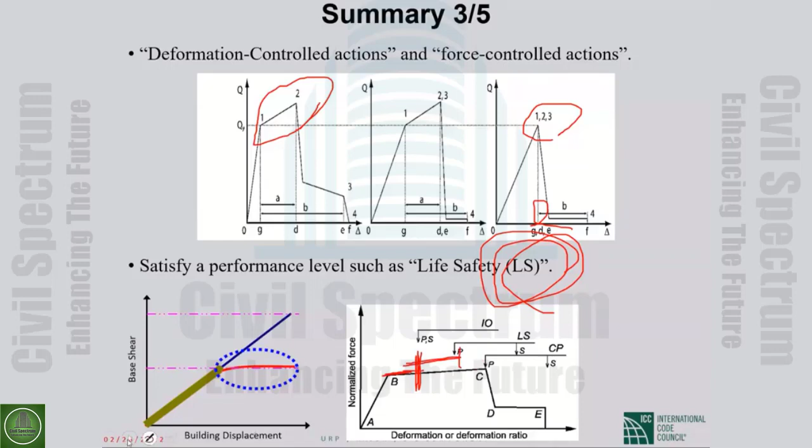Which one of the factors in base shear calculation of BNBC is not applicable to existing buildings? Of course, that's it. Calculation of capacities for deformation control and force control are different. Yes, that's the main approach.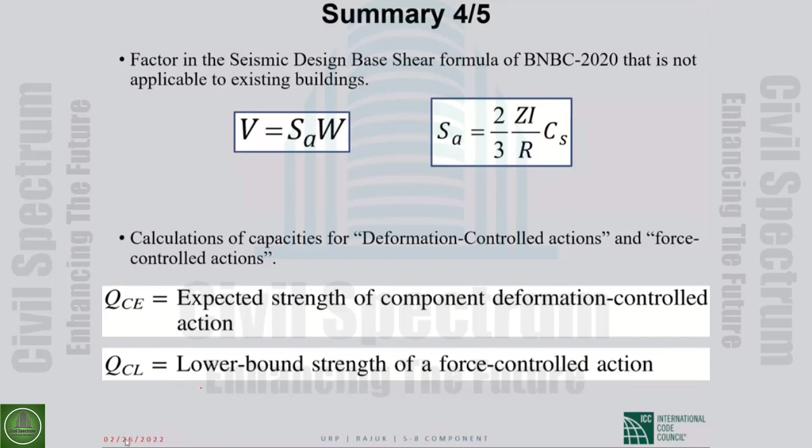We want to make it complex. Even for the same material, for the brittle behavior use lower bound. For ductile behavior, for example, you use mean values, except for that one, lower bounds. Good. And why is systematic assessment complicated?

It's not that we simplify it. Why do we want it complicated? Why not just use an R? Because for existing buildings, if you want to use one number, it will be the lowest one. It becomes very uneconomical, very overestimated. So we don't want overestimation in our evaluation.

What is the meaning of performance level? Performance level means damage. How much damage? More accurately, the performance level means the acceptable damage for that level.

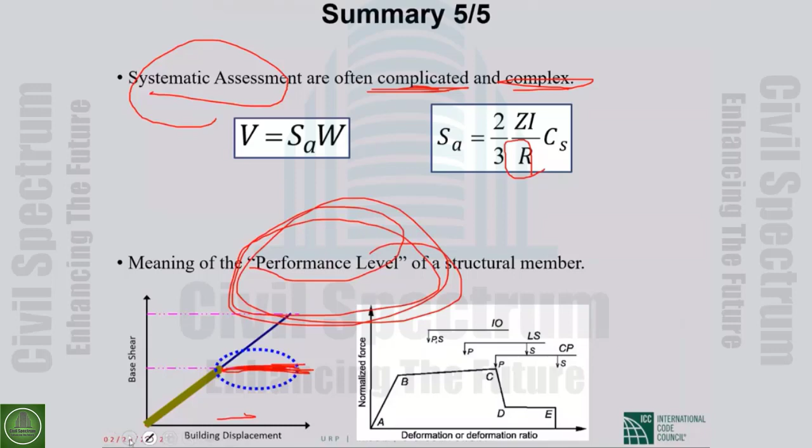So we have covered some very fundamental things. Generally, we know what systematic retrofitting of existing buildings means. Unfortunately, we need this course for existing buildings if we want to evaluate them systematically, because new buildings hide the complexity in a place we don't have access to. In new building detailing, they can inspect the building and be sure construction goes according to details. Not for an existing building—that's gone, none of the detailing is there.

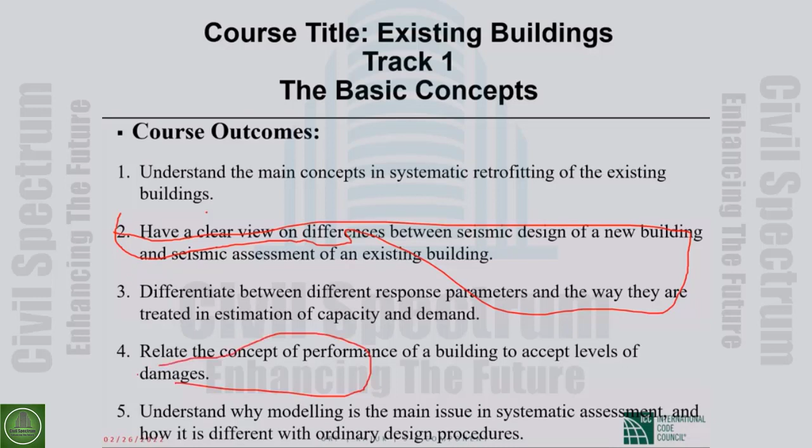Different response parameters: some are force control, some are displacement control, some are brittle, some are ductile. And damage and performance are exactly the same thing.

Why is modeling the main issue in systematic assessment? In these 10, 15 years, the most important improvement was in modeling, because we want to model it, not like seismic design where we can use an R factor, finish, and go with elastic analysis. We should model all the deficiencies that a building has and bring those deficiencies into the modeling. Maybe a building has none of the requirements of the new building code, but still satisfies the performance level. You should model all the deficiencies and show that the building, with all these deficiencies, can still satisfy the performance level. So all the good things that happen in systematic evaluation are in the modeling.